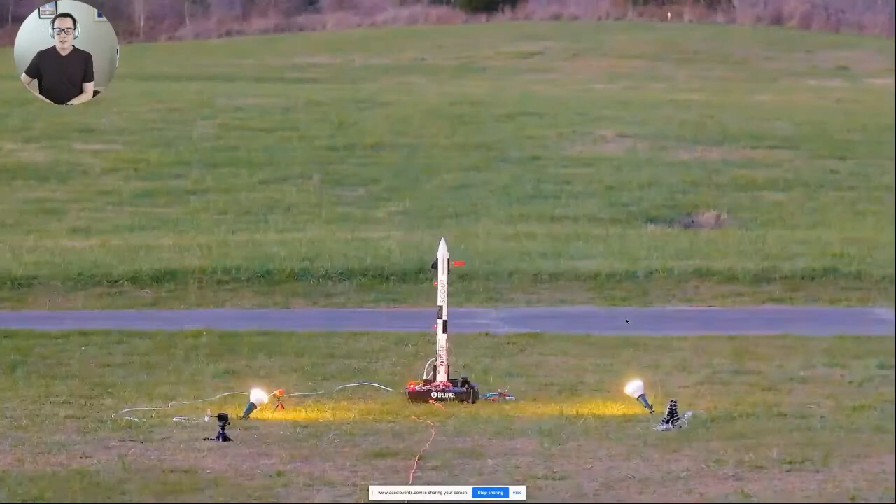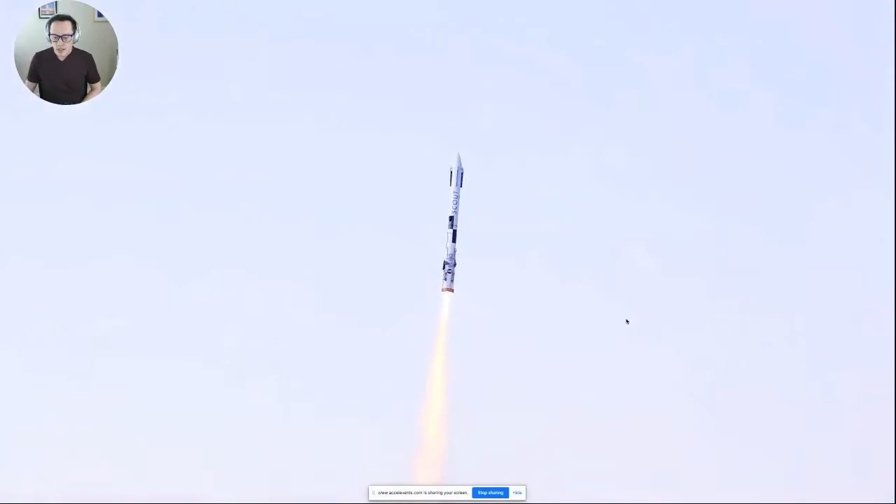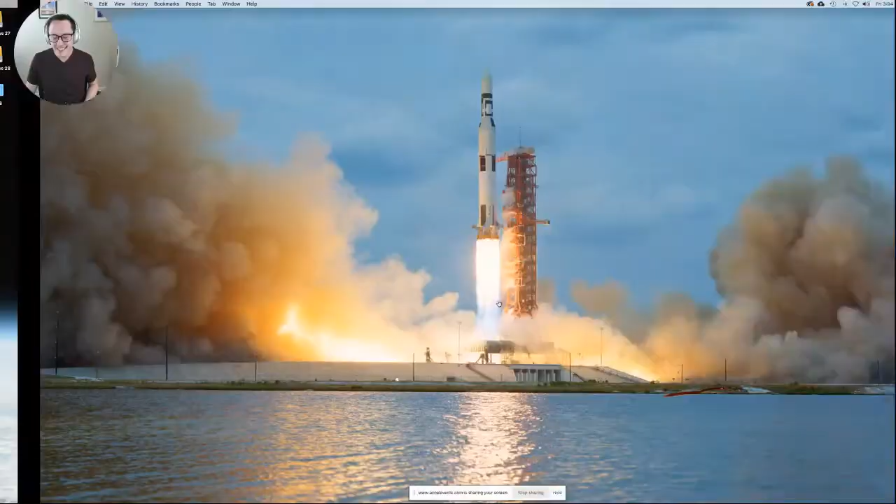First, what I want to do is show some footage so you guys can see what this is. You may have seen this on YouTube, but if you haven't, this is played back at quarter speed. Let me hide this little thing - no, that didn't work at all. Oh no, oh no, what have I done? Okay, let's try this one more time. Sorry about that, everyone, hopefully that's the only hiccup.

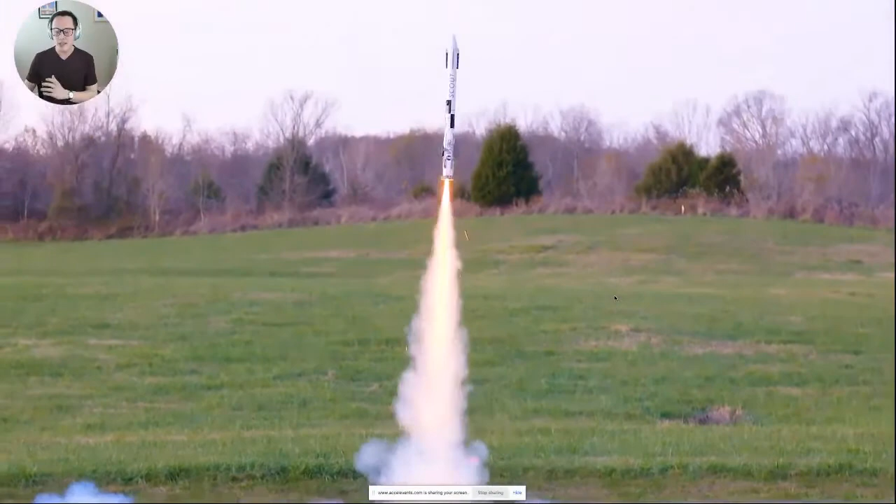So this is Scout E. I've built a bunch of rockets over the last 5 years that I've been running this BPS program, and Scout E is the latest iteration of this design I've been working on called Scout. So we have Scout A, B, C, D, and now E. This was flown in November of 2020, just a few months ago. We go up to about a 30-meter apogee, and the rocket weighs about 1 kilogram.

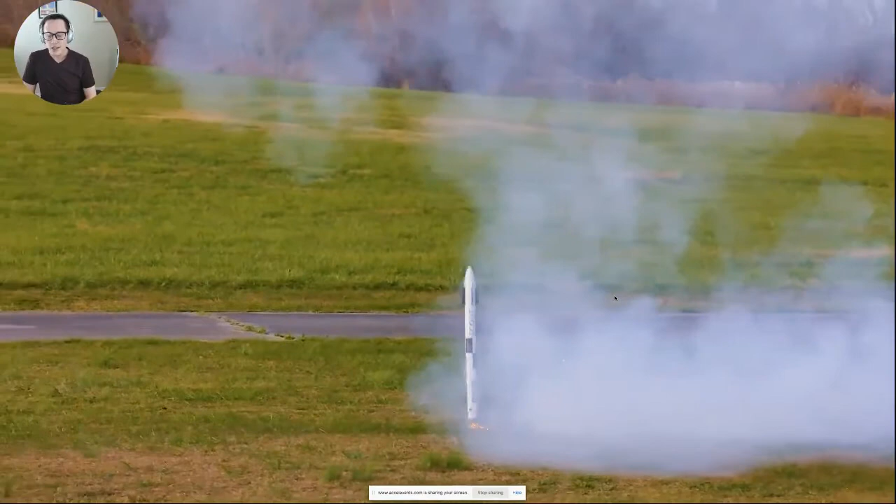After apogee, it pops fins out and ejects one of the motor cartridges - this little Estes F-15 motor - then it comes back down and does its best to try and land propulsively. And of course, as we've seen with vehicles big and small, it doesn't always go perfectly. So this one has a lot of slide on touchdown. We get pretty good with the altitude, a little bit of a hop at the end there, and then - you can't throttle these motors, so you have to get it pretty close. Now, you kind of can throttle these motors, and we'll talk about that in a bit.

But this is Scout. We'll have a lot of footage to review here, and I figure one way we could talk about this is to address different sections of the flight at different times. So first, we'll start by talking about the physics of how this works to sort of prove that it can. Oh, it looks like the frame rate's a little low on this - hopefully that's okay.

Well, we'll keep pushing forward here.

So we'll start by talking about the physics, and we'll go into the things that we need to control about the flight. We'll move on to the mechanics, like how we do that control, the electronics, the things that send the signals to that control system, and then finally the code, how the flight software is set up. So we'll try to address all of these things, and then we'll do questions after.

So starting with the physics, I consider this to be a sort of momentum management problem. And we'll do a quick example in a second, but on the left, you see a photo of two Estes F-15 rocket motors. I do want to address that there is an igniter in one of them. This is taken on the day of launch, and you have to preload that igniter before you fly this thing.

So to be perfectly clear, the leads on the end of that igniter are twisted. It is unable to fire, and that isn't armed until about 10 minutes before launch.

So we've got these two Estes F-15 motors, and one of the remarkable things that Estes has done, whether they meant to or not, is create an incredibly consistent burn profile. On the right, we've got a plot with newtons on the vertical axis and time on the horizontal. So it is a 3.5-ish second burn with an average of about 15 newtons.

This is data captured from actual flights, and this is data captured from, what do you call it, like a test stand with a load cell. So this is flown in multiple environments, these are multiple batches of motors. Their process control on building these things is very good.

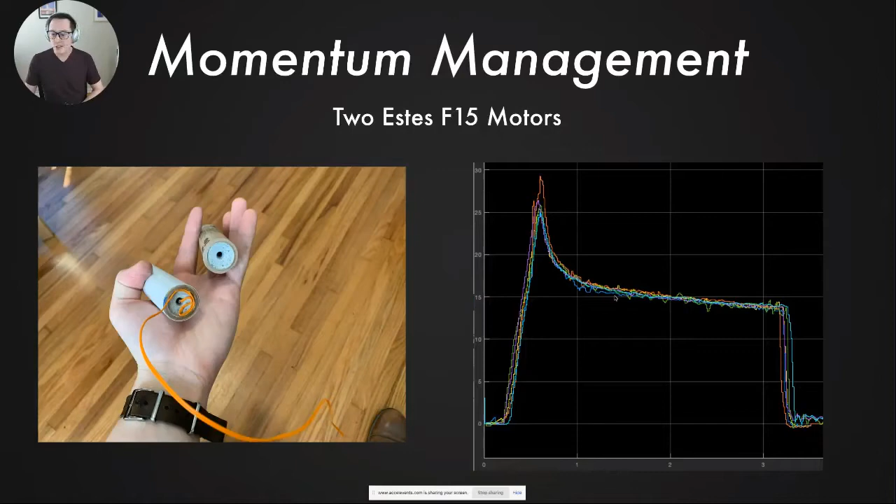I know they have a tour that they're doing on Sunday for NARCON, and I'm really excited to see what they show there. But let's talk more about this momentum management thing.

So consider the scenario where you're in space, in the vacuum of space, there's nothing around you, and we're not going to think about mass, we're not going to think about drag. So you fire one Estes F-15 motor in one direction, right over here on the left, and then you wait 2-3 seconds and you fire a second motor. Assuming the thrust is totally consistent between the two motors, assuming mass doesn't change, and assuming you have no drag, is it possible that second motor could completely arrest the movement created by the first motor?

Put it in the chat, I know the answer, and it's probably pretty clear to most of you. But the answer is that, in theory, yes. If you don't have mass loss and you have the exact same thrust and you don't have drag in the vacuum of space, you will arrest that movement of the first motor every time. You'll bring it back to zero no matter how long you've coasted or whatever.

You put some amount of power into the system, and then you take the exact same amount of power out of it by firing the equal and opposite direction.

So now let's add something. Let's talk about mass. What happens if the first motor fires and we lose a little bit of that propellant mass? So now the rocket that's traveling through this hypothetical space situation has a little less mass. On the right side, when you fire that second motor, are you going to arrest the movement completely, or are you going to end up going a little bit back toward it?

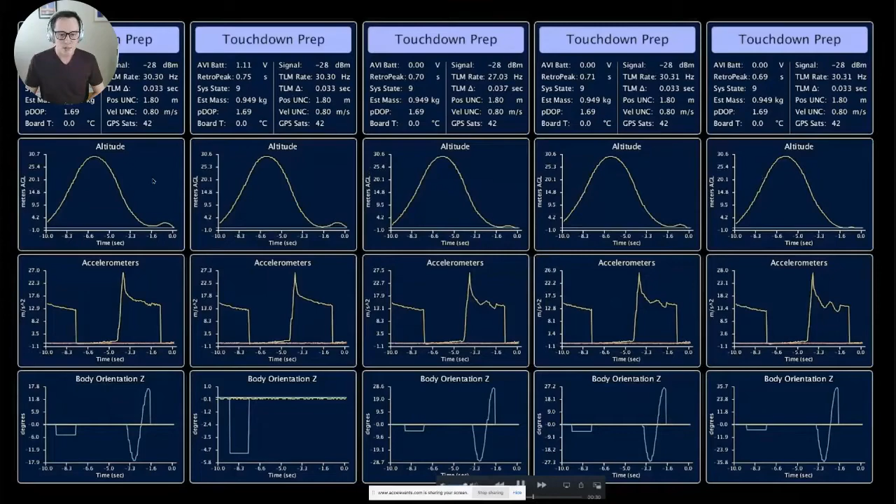This is a complicated slide, but let's focus on these five different simulations of a flight. These aren't actual pieces of flight data, but if you look at the altitude plots, the second from the top, and zoom in, all five have that little hop in them. This is just a physics simulation, accounting for mass loss, drag, and as much as we possibly can without actually flying the thing.

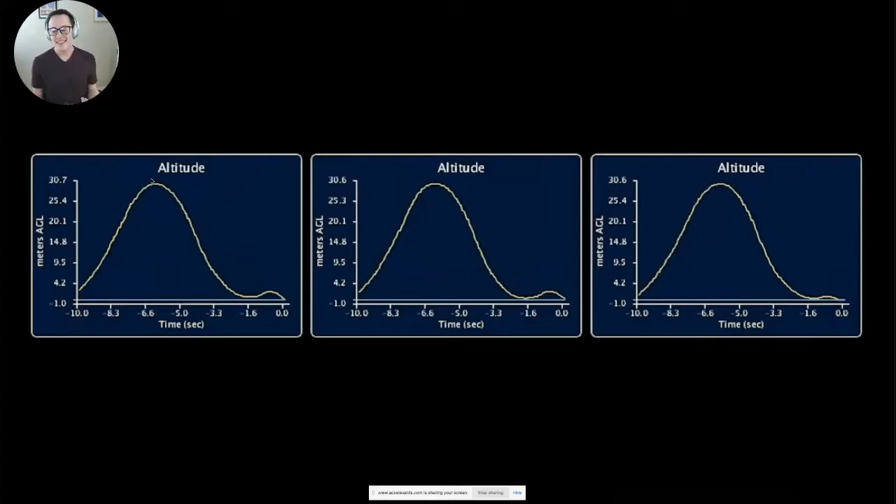So that's just to get everyone familiar with the idea that we're going to have a little bit of a hop if we don't bleed off the thrust some other way. Okay, that's the physics part.

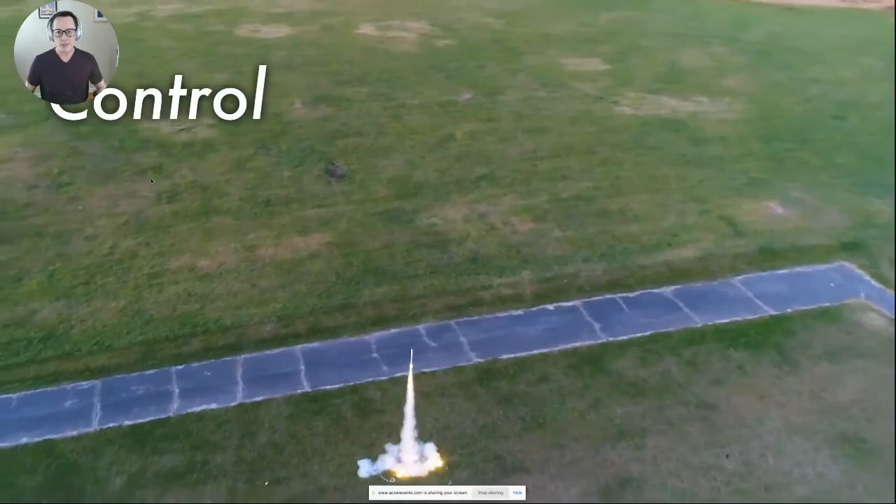Let's talk about control now, specifically the aspects of this flight that we need to control. The first thing that comes to mind, especially for people doing thrust vector control rockets, is your attitude - the angle the rocket stays at. You're balancing a pendulum by gimbaling the motor at the bottom. You want to control your attitude.

Roll technically counts as attitude too, but I'm going to add controlling roll into this separately. You could launch and land one of these things without any roll control, but it makes the control system very happy to have a little bit of roll control. Let me get this glare out of the camera.

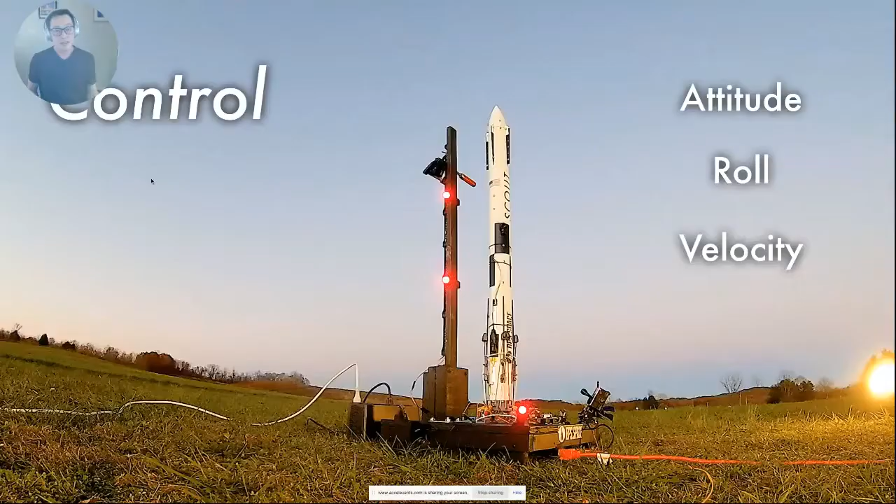The other things we need to control are velocity - not just vertical velocity, but horizontal slide as we touch down onto the ground. We need to control that slide and make sure we're not going to tip, like you see in most of this footage.

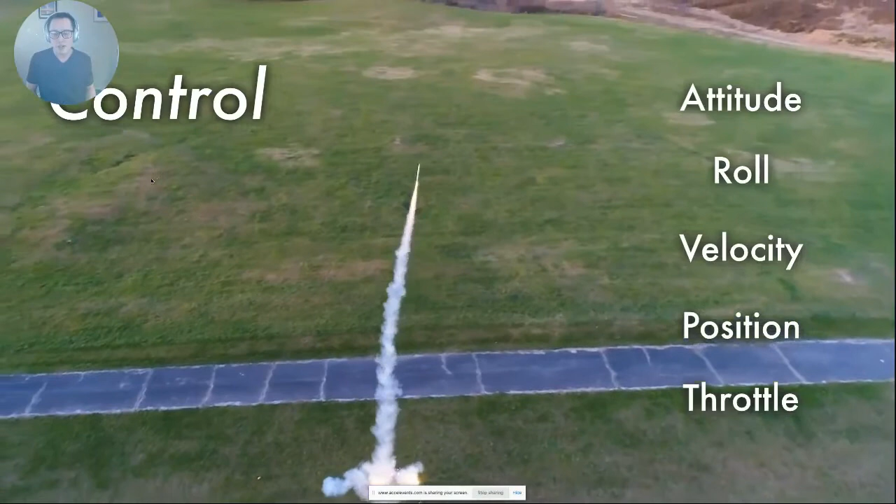By that same effect, we want a little bit of control on position - some of these shots are fun to watch when you can see it coming down off to the right. We want to control position, and then we want to control throttle as well. We need some way to control the thrust, since it's going to be very hard to get it right on luck alone, and enough changes during the flight that you need some type of control over it. So these are the things you need to control.

Okay, let's talk about how you do it. I cannot get the glare out of this camera. Hold on, let me see if this helps. This might make it worse. Well, okay, I don't know if it's going to get much better than that.

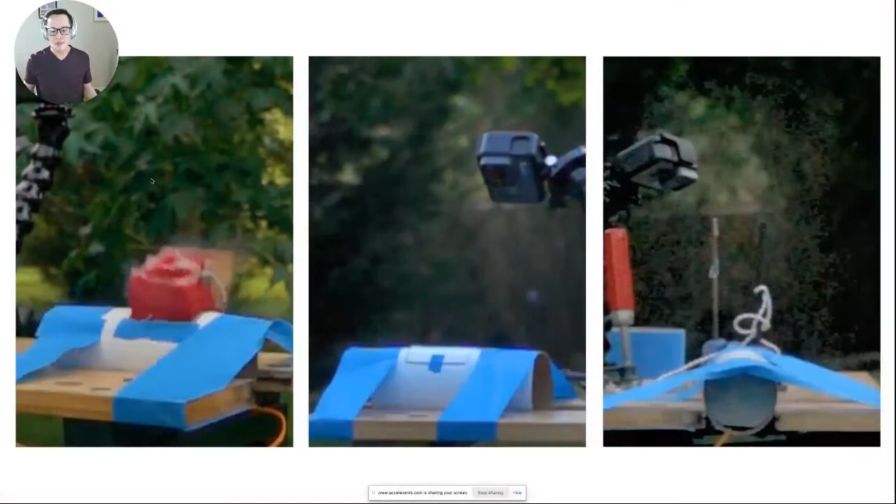So the mechanics - how do we actually make this stuff happen? Let's start with the simplest stuff, let's start with parachutes. You'll notice in the video I showed, there are no parachutes on this rocket, or at least none that deploy. In contrast with most model rockets, we're coming down under thrust.

But what happens if you're going up and a servo fails? Or you program something in wrong and the flight goes off course? Or you try to light the landing motor and it doesn't come up to thrust? These are all bad days. If you're going up to 30 meters in an open field of grass, who cares, you're just going to smash the cardboard tube. But it's experimental stuff, you want to be safe.

So I have parachutes that pop out of the side of this vehicle. Side deployment is usually pretty risky if you're going fast, but because we're going pretty slow, we can sort of afford to do this. You can see me experimenting with a couple different parachute packing methods. This is all shot at 1,000 frames per second. We put a gratuitous amount of black powder in this little compartment to get the parachutes out, and you'll probably not be able to notice it on the vehicle.

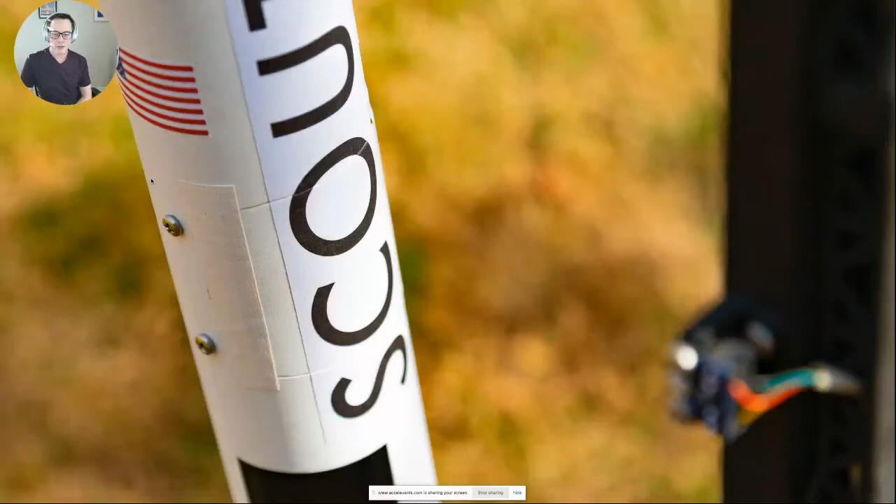It's pretty well concealed, so here's a close-up shot of it. This faces towards the back of the launch pad, and there's a bunch of abort criteria we can talk about later. Imagine the rocket coming down totally sideways, parallel with the horizon - if you fire that landing motor, you're not going to pitch back up in time and spend the right thrust in the right directions. So there are scenarios where you want to use these parachutes, and each flight has those armed and ready to go. Moving on with mechanics, we can talk about landing legs.

The stuff on the bottom of the rocket - these are 2mm and 4mm carbon fiber struts. They're solid rods, terminated by little PLA 3D printed joints, then epoxied together. Dialing these in was really difficult. We had an intern at BPS over the summer who did the majority of the design work on these. The leg ends up overextending, and because the carbon fiber has a little give, we can overextend the leg and have that strut slip into place and be retained there. It took a lot of dialing in, but the huge benefit of using really stiff materials in compression, like carbon fiber, is that there's very little bounce.

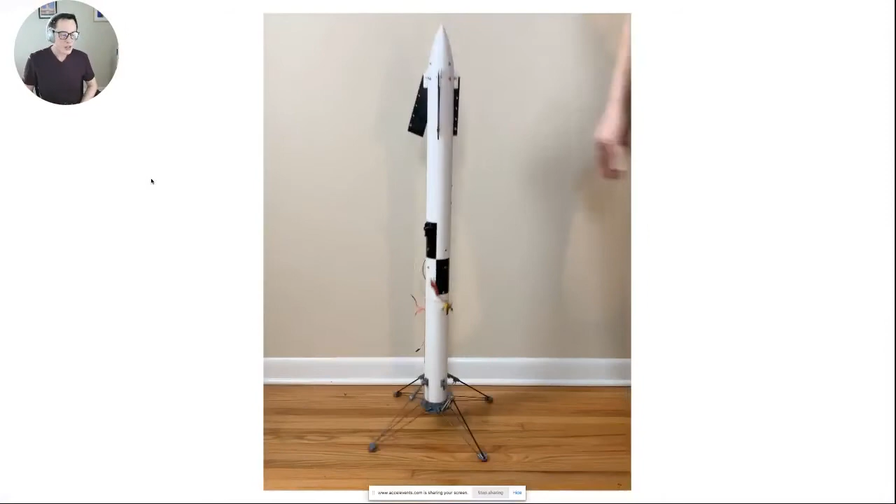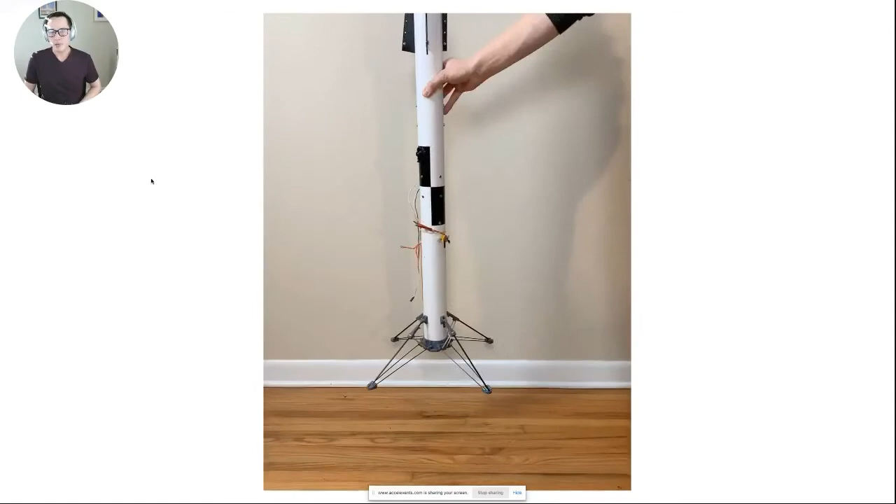I'm not sure how well it's going to translate with the frame rate on this presentation, but you'll have to take my word for it that as this vehicle drops onto the hardwood floor, there's essentially no bounce. As it turns out, all of the bounce in these flights seems to come from the sponginess of the grass at the launch site. We can talk about this later, but we still have to work out some of the bouncy problems with some type of crunch zone or something that can absorb the energy without putting it back into the system.

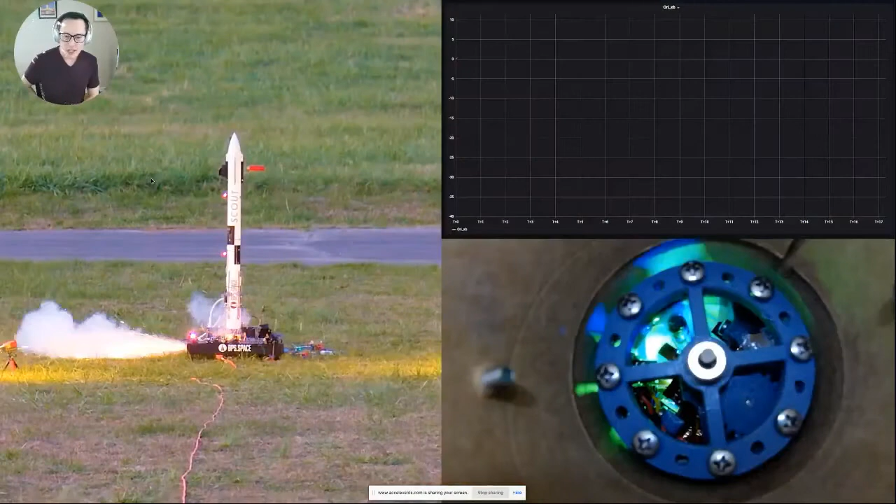This one's going to have to play a couple of times, and it's going to be tough with the frame rate. But this is a roll wheel that's inside the vehicle. On the bottom right, you're looking at the top of the flight computer. There's a little tiny wheel that spins up and down depending on the roll angle or roll attitude of the rocket. The same way a lot of spacecraft change their orientation over time, we spin up or down that wheel to exchange momentum with the rocket. If the rocket rolls one way, we can spin up the wheel and correct for that. Not totally necessary, but it keeps the control system happy if we're not spinning too fast. On the top right, you can see the plot of the roll wheel as it tries to control the orientation. We don't even need to spin it up on ascent, which is interesting - we just don't get any roll torques during ascent. Okay cool, so that's roll.

This stuff is really cool - these are the fins up top and how they work. I'll let this play a couple of times. The fins are printed out of polylactic acid. This is probably objectively the worst way you could possibly make fins - they're plastic PLA, so they're extremely flimsy. You can even see it in the video here. They're very flimsy, so they're not going to put much force into your rocket without bending or giving a lot. But the idea is I just needed something that could barely work and correct the flight while we're in an uncontrolled state.

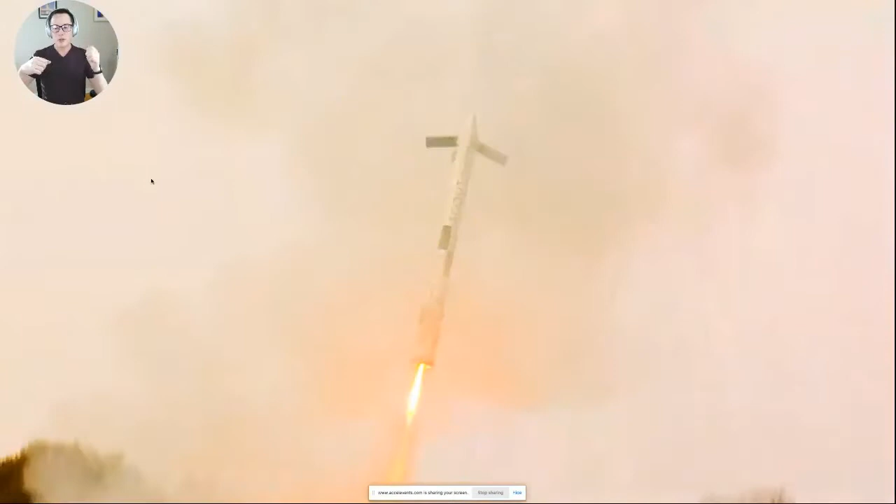The fins are pushed out with a tiny servo up in the nose cone. They're retained in the rocket with a little piece of Velcro that slides against the airframe cutouts. Then they're retracted by gravity, by their own weight, because they're just hinged at that one point. If we go here, you can see them deploy in flight - watch this a couple of times. The motor ejects, the fins come out at apogee, then here we go coming down. If you look closely, you can see the fins bend. When we come up to peak thrust, the fins slightly sag because the servo is actively trying to resist them going back into the airframe, especially under peak thrust when we're at probably 2G of acceleration - it starts to push a little harder on the servo.

But anyway, the fins come out, and you can see they definitely work. Without those fins, we would have rotated a lot further in the other direction. Trying to prepare for the landing burn, we want to be as close to upright as possible, which makes the rest of the flight a lot more predictable. Then we bring the fins back into the vehicle. I'll show some data about this later.

The fin criteria for being deployed: anything past apogee, the fins must be open, and anything under 4 meters per second when we're close to the ground. After about 4 meters per second, the fins have very little effect, and frankly we could put them back in the vehicle at this point too and it would be fine. But that's just sort of how the controls on those work.

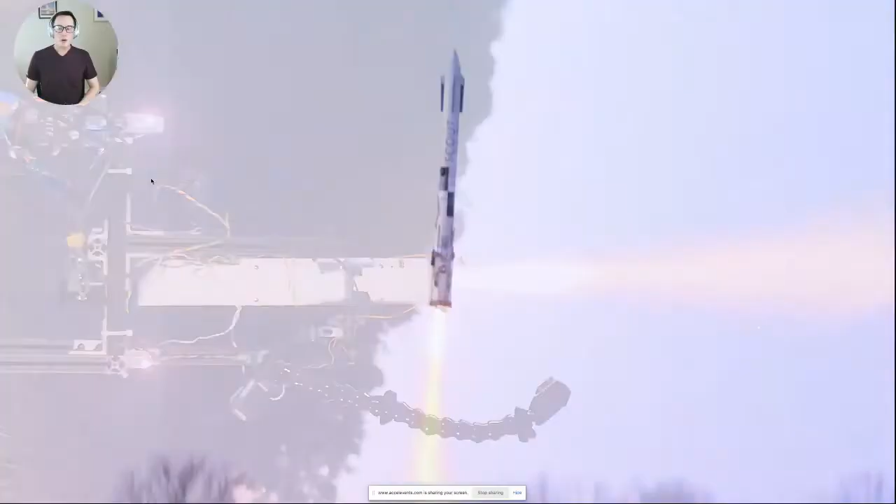Oh, I forgot I put this shot in here. This is a nice little digitally stabilized shot, so it's very rock solid in the picture. But you can see the rocket sort of kick itself over on ascent to clear the pad for when it's coming back down.

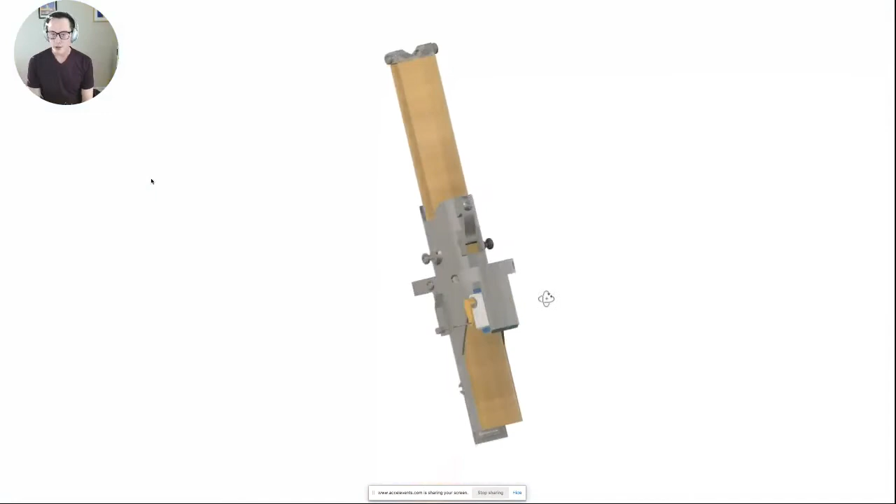In the meantime, I'll keep talking about the motor. This is the CAD file, the design file for the thrust vector control mount. It looks a little wild and odd, but I'll walk through what's going on here. There are two motors in the frame. The top one is for landing, stored in the airframe. The bottom one is for ascent, so that's what gets us up to apogee.

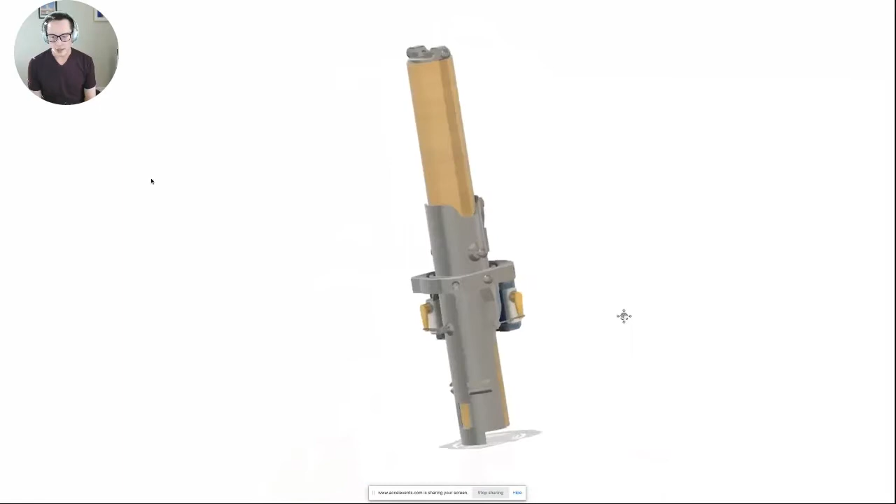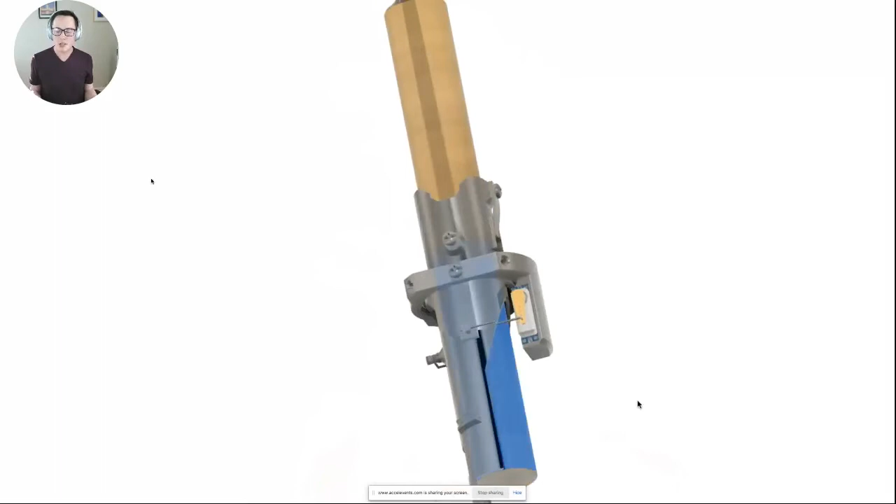On the top motor, there's a little bit of a hat, literally called that in the CAD - it's just a motor hat, like a little party hat. The two screws you see on the side have a set of springs constantly putting tension against that landing motor. So all it takes to get the landing motor into place is to remove the ascent motor. It's a design I'm quite proud of.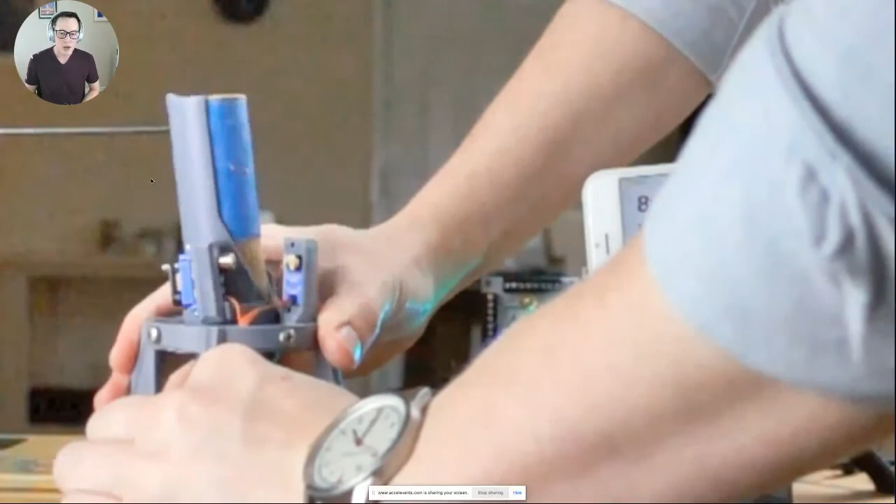Anyway, let's take a look at some footage. We have to remove the ascent motor to get the landing motor in place, and you can easily see how it happens. When we slam the ascent motor into a rod and slightly bump it out of place - because we only have that half circle encompassing most of the ascent motor - when we slam it out of place, the landing motor slots into place, and you can see that locking pin engages so that the landing motor can never go back up into the airframe.

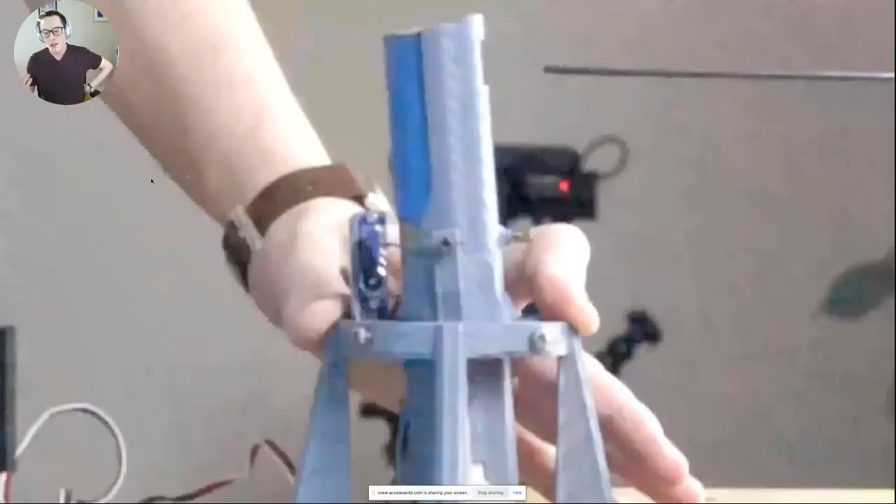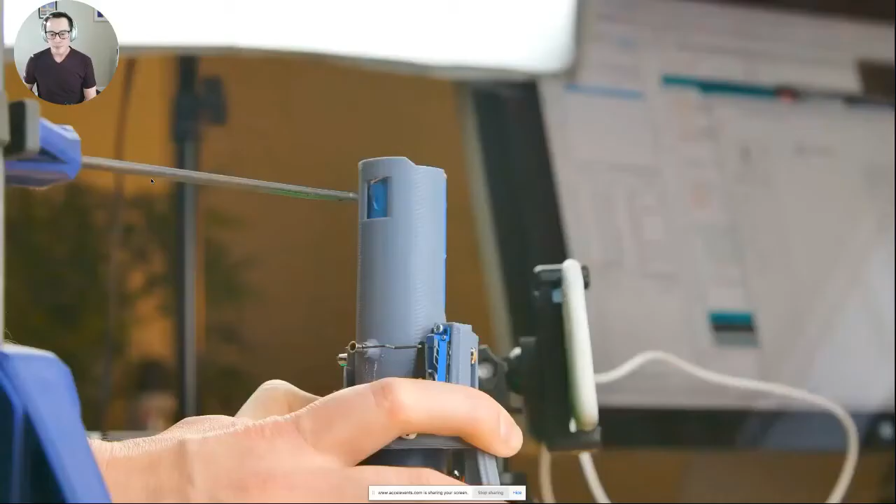It took a ton of dialing in to get this right, and you'll see footage on footage on footage of how this works, because it's totally new. I've never seen anyone else do this, and you can imagine how bad the day would be if the flight failed because something as simple as this didn't work. You certainly don't want to fire the landing motor when the ascent motor is in there. So there's just a bunch of footage of this - some tests are more successful than others. Again, copious amounts of characterization here.

So what I'm doing in this shot is trying to see, over multiple motors with slightly different masses, how consistent the ejection forces are by ejecting it upside down. I'm also testing how you can safely mount the igniter in the landing motor and not have it come out during this violent event.

This looks very slow and graceful. The problem with this is, of course, it's violent. It's violent as heck, and so I am a little concerned about propellant fracture if you do this with a motor too much. I wouldn't eject this thing 10 times before you fire it. There's some, it's a little concerning to try and get this ignition cable out of the way.

It works fine for the flights, and so much of this stuff is just insanely complicated that whatever, let's add more complexity. But anyway, so here's some more shots.

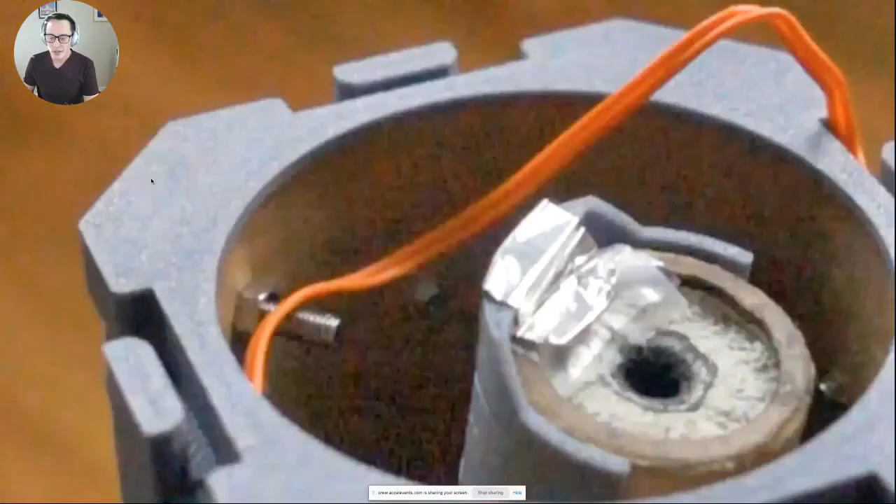One of the hardest things about getting this right was the static friction between the ascent motor and the lip that retains the ascent motor, the lip that the landing motor slams against. So here you'll see a failed test where we hit the ejection pin and nothing happens because there's all of that spring-loaded force pushing against that lip.

So I'm experimenting with tons of different materials in between. A 3D printed surface is not that smooth. Any of you who have tried 3D printing before know that the surface, depending on what it is, has all of these little boundary layers, these little ribs on the print. And so if I want to keep manufacturing this part out of polylactic acid, which is really convenient, so I do want to,

I had to find some way to make this ejection more consistent. I mean, this looks janky as all get out here. This is sketchy. So what I ended up realizing is, how do you move a heavy object across a flat surface? You roll it.

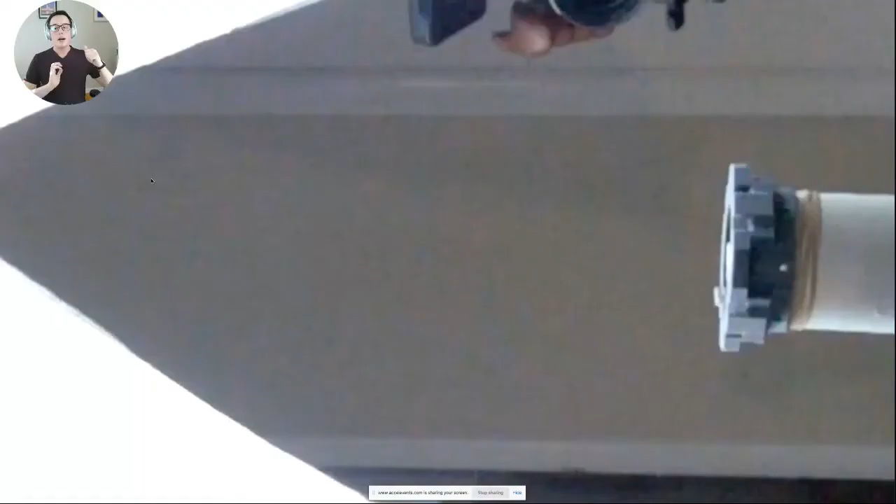So there's a steel roller bearing that's a part of the design now, and you can see it in this shot a little bit better. We get rid of all of that static friction problem because it's very easy to eject the ascent motor if all of the force is against what is essentially a large, as large of a surface area as you can get wheel that it rolls along to eject the ascent motor.

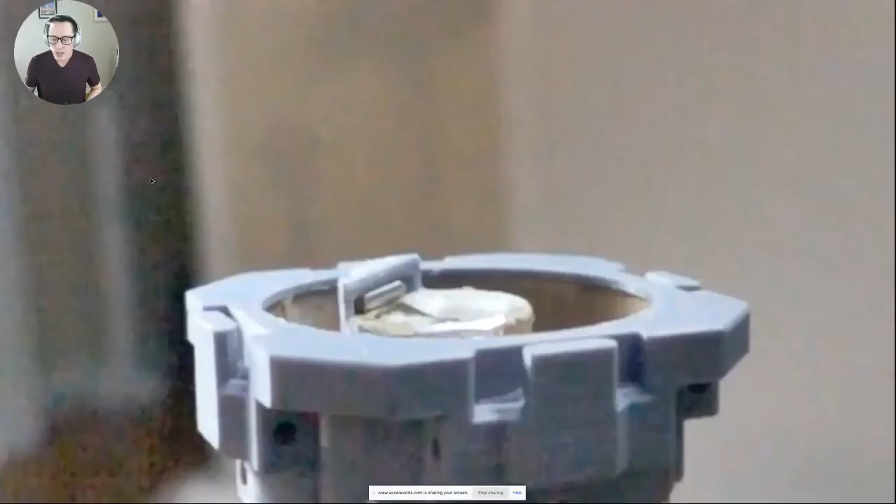And this ended up yielding really high reliability, and you can see there's a bunch of tests with it here. I can't remember how long this clip is, actually. Let's see if anything else comes up. Yeah, I think this might be the last shot in here. But yeah, so you roll it along that little lip, and then it slots into place.

Okay, now we can talk about electronics. So with electronics, what do you need to control? Let's think about that from the top level.

We need some ability to fire parachutes. Again, you don't want to, but you want to have the safety of doing it the right way. And so part of that is having some backup system in there in case the second motor doesn't work.

We need to be able to actuate the upper fins, which could, in theory, be pyrotechnic deployment if you wanted to do a one-time deployment, so you need a couple of pyro channels. Same with leg deployment. The way I deploy my legs is they are constantly spring-loaded, and we cut a little nichrome wire, or cut a little rubber band with a nichrome wire, and that deploys the leg. So that has to be another pyro channel.

We need the ability to control a roll wheel and TVC servos, so those are PWM outputs. That's like a servo-type output.

And then in terms of sensors and components, the things we need are, first and foremost, an inertial measurement unit. This is going to give us measurements of our gyroscopic rate, how fast we're moving, the angular velocity, and acceleration, linear acceleration along 3 axes.

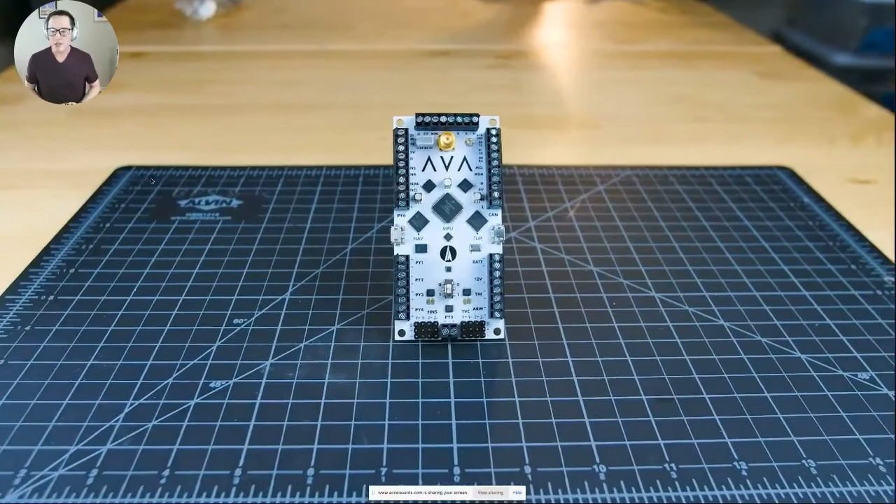I ended up designing this computer about this time last year. It's called AVA, which stands for All Vehicle Avionics, and it has all of those sensors and more. The design philosophy behind this, it has 3 processors - that's what we're showing there.

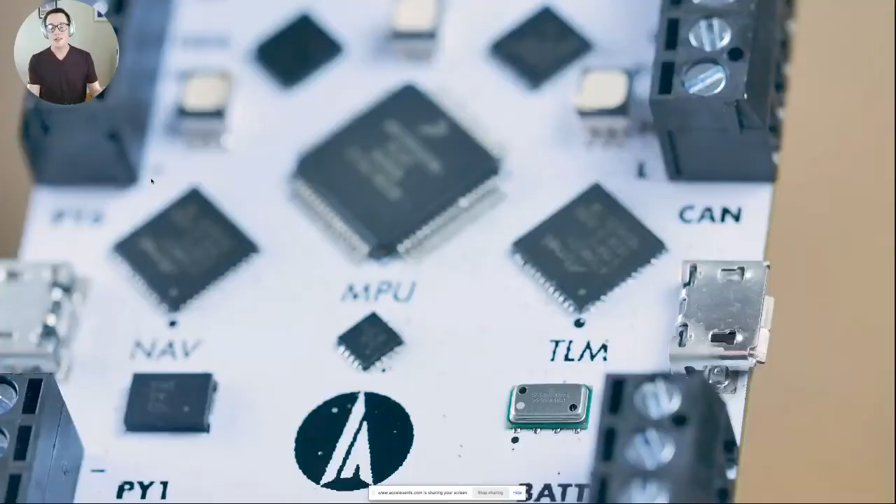I've designed a bunch of printed circuit boards, way too many, and I was kind of getting sick of it. So I decided what I'll design is one circuit board to rule them all, everything that I need for the next 2 years. And so that's what this is.

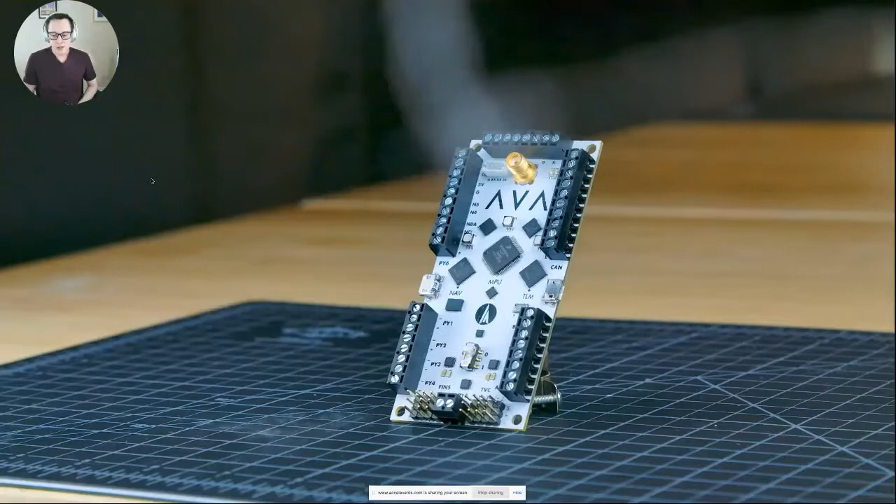It's got an inertial measurement unit - it actually has 3 technically. It has a barometer, GPS, Bluetooth, all sorts of stuff. It's a very, very fancy computer.

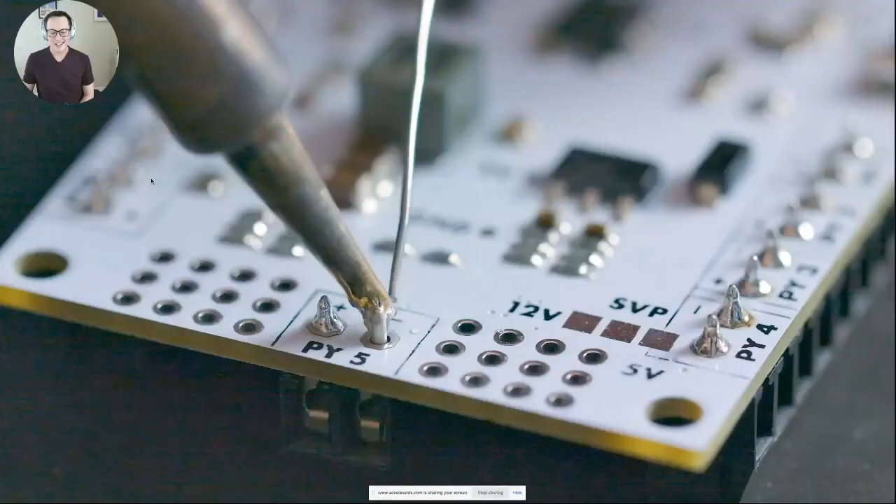And when they catch on fire or crash into the ground, it is sad because they're also expensive. Okay, definitely not speaking from experience on the fire or crashing into the ground. No, sir.

Okay, so now we can talk about software. This is everyone's favorite thing because it's really hard, and coding is kind of also hard. At the core of most of the stuff that I build is something called a state machine.

A state machine is this really powerful way that you can set up software so that you can run isolated chunks one at a time. They're found in almost any device that you have - if you have a smart fridge, it's probably running a state machine in some way.

An easy way to look at it would be, for this specific flight profile, we have different states of the vehicle where we run different little chunks of code over and over again, and that lets us isolate things out.

So what states would we have for a rocket like this? We could start with the idle state, the state where it's on the pad, just reading sensors. We could be calibrating some sensors on the pad constantly, and then we want to detect launch - that would be one of the things we run in this control loop of the state.

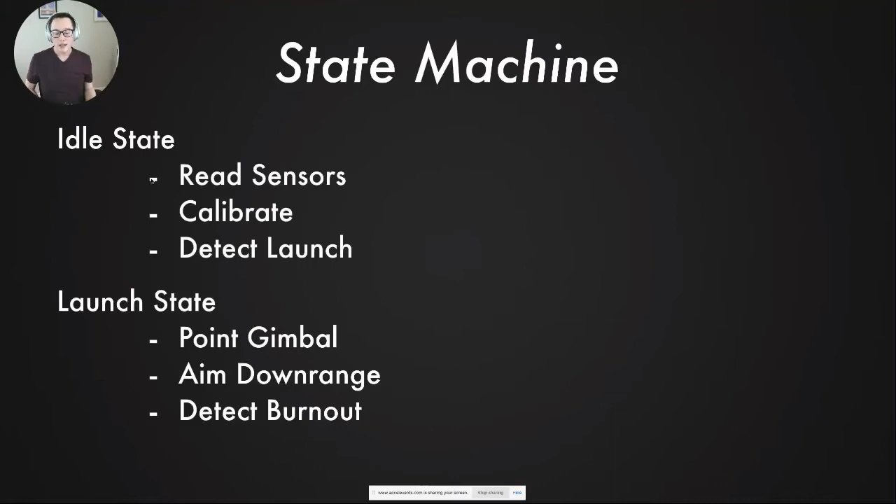Then we have a launch state, when we're flying under thrust. We're pointing the gimbal mount, pointing the rocket motor, aiming down range to try and clear the pad a little bit so that when we come down, we don't hit it. And we're trying to detect burnout - that's the launch state.

Then we have a coast state, where we eject the motor, deploy the fins, and start the second burn. Right, so that's our coast state.

And then finally, we could have a landing state, which is triggered by the starting of that second burn. We restart the gimbal, we plot the throttle divert maneuver - I can't remember if I talked about that yet, there's a lot to talk about - and then we detect the touchdown. So these are all of our discrete states of our state machine, and this is a vastly simplified version of what's going on.

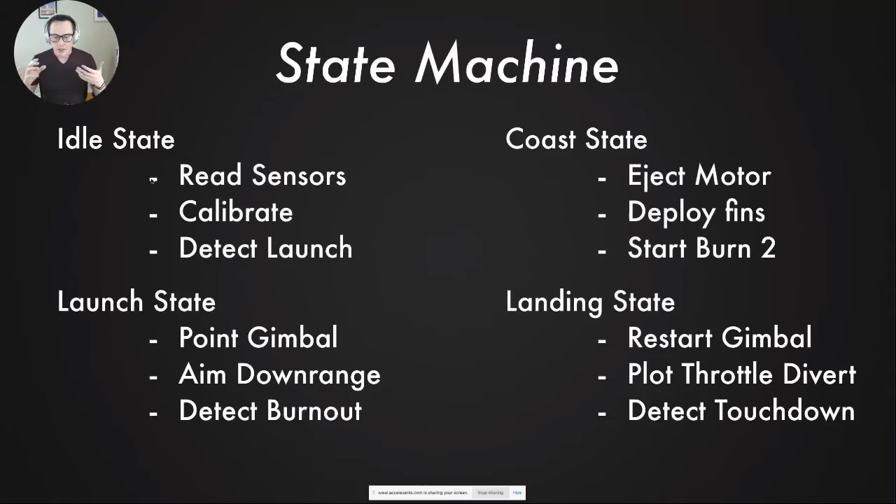So I'm going to play the live telemetry. One of the things that Ava does is beam telemetry back down to the ground. I wrote a telemetry visualization software that shows the state of the rocket and what the flight computer is doing. Take a look in the upper left of the screen, and you'll see the state is ready for launch, and then it flips to flight vertical.

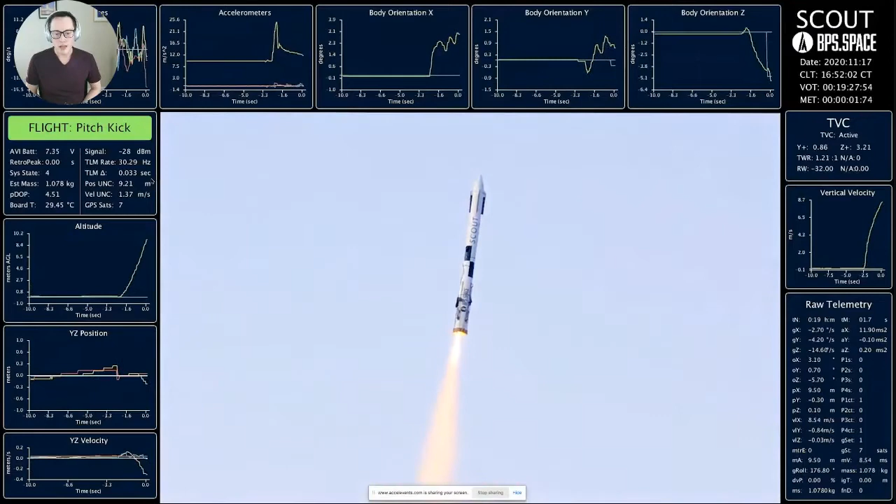You'll see it flip again to flight pitch kick, which is where we're trying to head a little bit more actively down range. Then, 1 second after burnout, we go to unpowered ascent. Watch when we pass apogee, we go to unpowered descent. Fins come out, and then right here we should switch to landing burn startup.

Right after we start that burn, we take a few measurements and calculate a divert to bleed off the excess thrust that we don't need. So it's a 3.64% divert. Then we do a little touchdown prep, which is basically a settling maneuver. We're trying to kill those gyroscopic rates and keep it as upright as possible to have the best chance of landing. So those are all of the states that the rocket goes through.

Of course, we have states that aren't shown here, like an abort state. If I ever send the abort command from the ground, we can beam that to the rocket, or the rocket can decide to do it itself. It'll pop the parachutes out and move to an abort state. You never really want to see it, but it is pretty cool—it turns the whole thing red. So we'll watch this one more time.

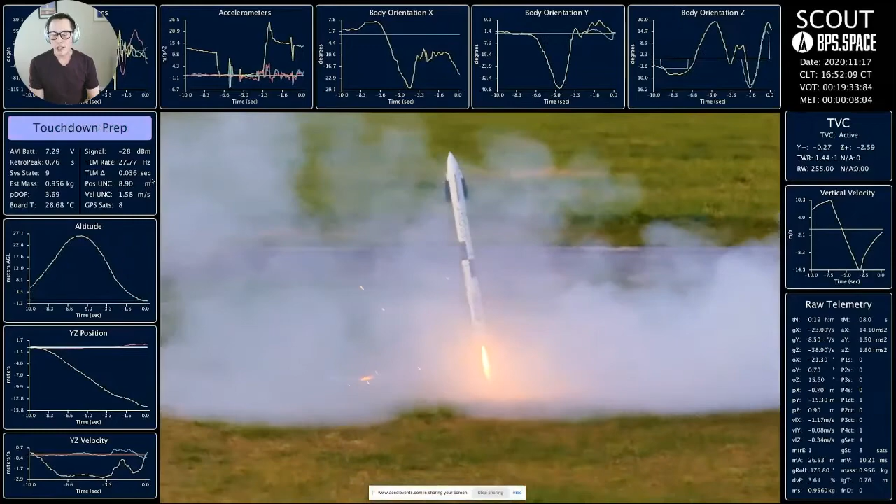You can also take a look at some of the other pieces of data showing up here. You have vertical velocity on the right, altitude. If you look at position and velocity in the bottom left, you can see us move—we end up going about 10 meters downrange. You can also see the thrust curves and the accelerometers. This is played back; the whole flight is like 9 seconds long, so it's played back very slowly.

Okay, great, so that's that. Okay, Kalman filter—raise your hand if you've heard of a Kalman filter before. I can't see anyone's hands, so we'll assume maybe 1 or 2 people have, and we'll try to cover it in a really simple way. This is one of the more important things that I ended up working on with the software for the landing stuff.

You need to be able to measure exactly where you are to make decisions about how much you need to divert the rocket to bleed off excess thrust. You need to be able to measure exactly what your orientation is, exactly how fast you're moving. You need to know a lot about your situation. And the problem is that many sensors return data that's really noisy or very slow.

Right here, what you're looking at is a data plot, time on the horizontal axis, and speed in meters per second, that's velocity. This is the GNSS_X_Vel_m_s—not a very catchy name, but essentially these are the GPS readings. The GPS is saying, I think this is our velocity going up and down. At 3 seconds, we're up to almost 10 meters a second, and at 6 seconds, we're down to almost negative 15 meters per second. So you can sort of see the flight profile here.

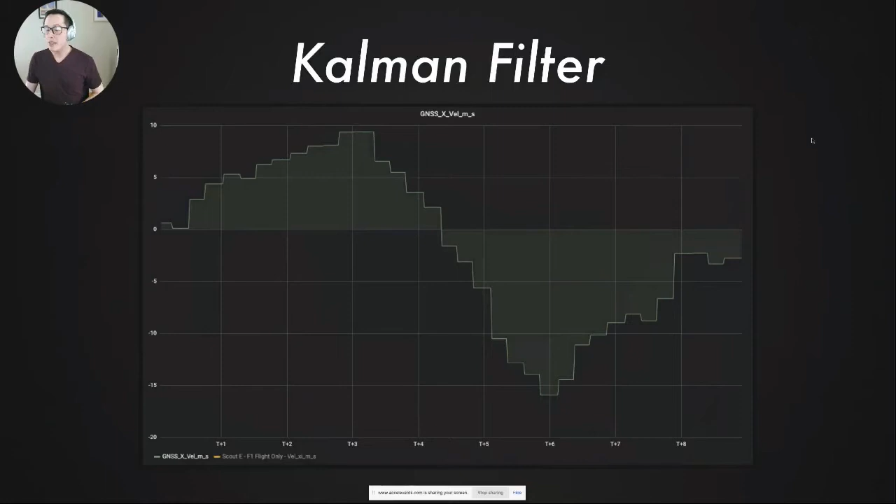So what's a really high-speed sensor that we could use for this? What about an accelerometer, which does not measure velocity, right? The accelerometer measures acceleration, but velocity is the integral of acceleration. Acceleration is the derivative of velocity.

Getting into math here. But if we take this acceleration data and integrate it over time, we'll get our velocity on the rocket. And as long as that acceleration data is pretty well accurate, pretty well calibrated - this is actually the real data from the flight here - if it's pretty accurate, we could come up with an estimate of how fast we're moving.

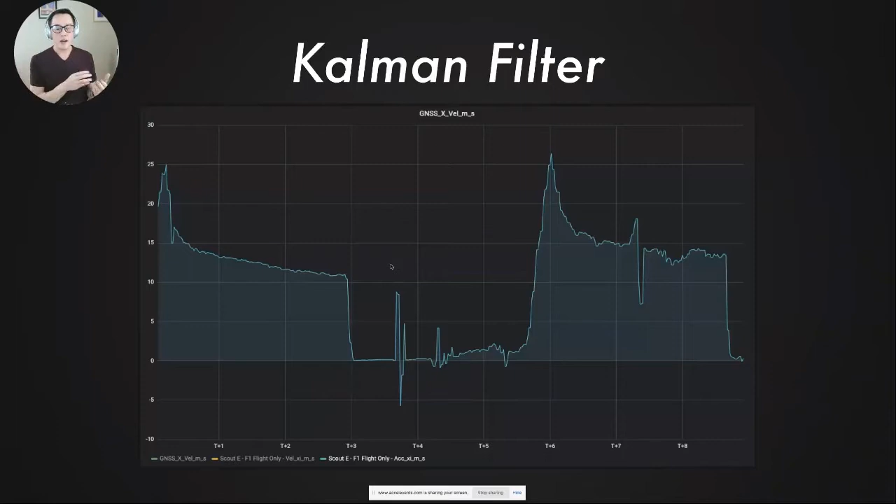And we could probably use the known noise profile of the sensor to have a good idea of how accurate that data is. We could quantify that.

So what ends up happening in a Kalman filter is we use these external sensors that may not be directly correlated or directly responsible for the measurements, but they definitely have some correlation with the measurements we want. So we want to know what the velocity is. If we integrate that accelerometer and keep track of how noisy that sensor is, we can get a pretty good velocity estimate. And that's what we have right here, all the way down to us going up a little bit, having that little hop. We have a little bit of positive velocity at the end of the flight.

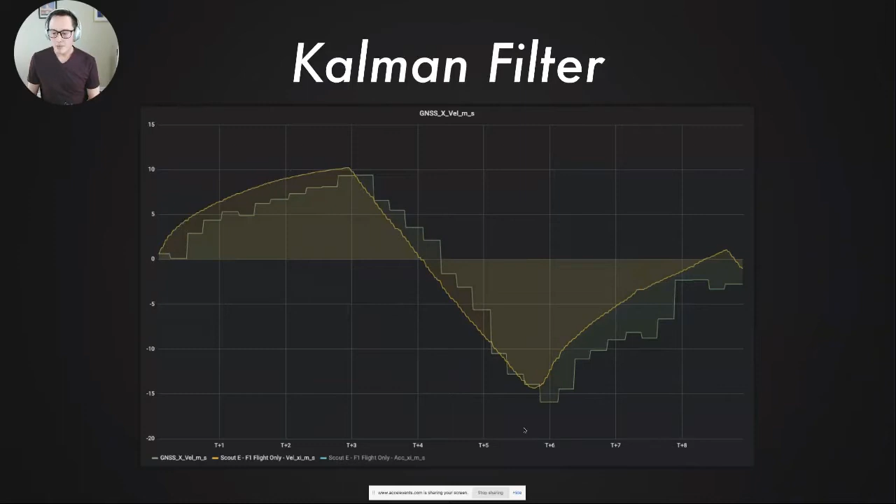And you can see that this data ends up being a lot faster. The GPS reports slowly - we're only coming in at like 4 hertz of update rate here. But if we take those accelerometer readings and bring them in, this is really smooth data that we can work with.

PID controllers - this is a slide from last year's presentation. Whether you saw it in Tucson, Arizona when I presented, or saw it online, or didn't see it at all, I'll do a really quick overview.

A PID controller is not a physical thing. It's sort of a set of math, a set of equations that you can use to try and control something. So the example that I use a lot is trying to control the angle of the rocket. With your rocket at 10 degrees, how do you know what gimbal angle to set so that you can come back from 10 degrees?

And so it ends up being pretty simple. If we have angle on the right side here, we can do some math on that angle and then come up with an equivalent thrust vector control mount angle to correct for it.

So we have a P term, which is directly proportional - whatever we set here as a number, we just multiply it. So it's 0.5 proportional to the angle. If the angle is 10 degrees, the resulting value will be 5.

The integral, that's the I term of PID - the integral takes the error over time. And so this is usually a pretty small value that helps us correct for misalignments, can correct for a whole host of things. And then the D is the derivative.

We take dx over dt, which is the derivative of the angle. You could also feed in the direct gyroscopic rate - that would also be the derivative of the angle. We multiply that by a small value, and we add all those things together, one big PID soup, and then we write that to the TVC mount.

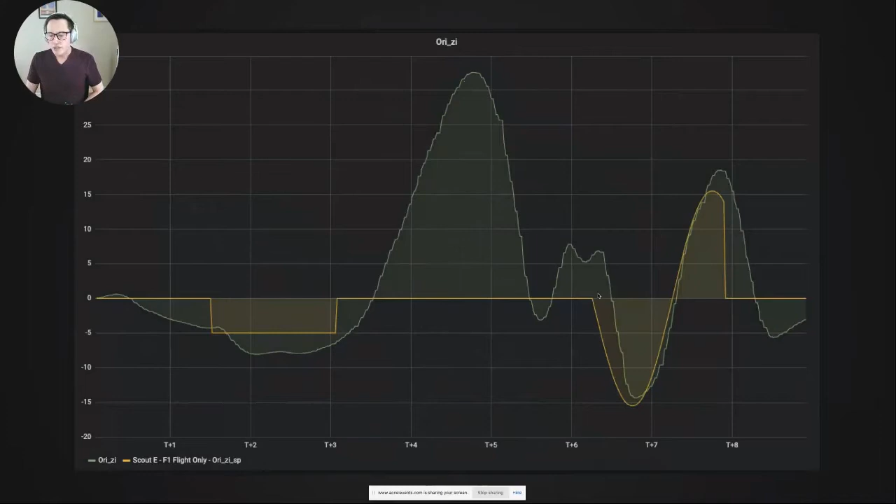Because our control system is really dialed in on landing, that pitch looks kind of wild on the footage, and it looks like, oh my gosh, this isn't well controlled. It actually is. This is very close to what the simulations show. We cut it off a little bit early because there are a couple other phases of the settling maneuver that we want to hit. But basically, this is a PID controller that's trying to track this set point. It's trying to command the rocket to exactly 15 degrees negative and exactly 15 positive. And of course, we don't exactly hit it, but it's quite close.

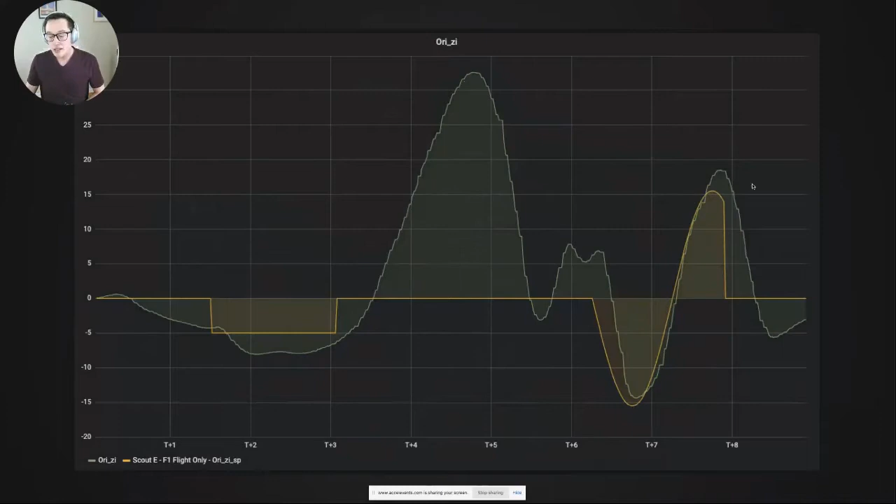We can also see PID control at work on the velocity reading. So this is the horizontal velocity. It gets a little easier to understand if you think about it from that camera angle again. So we are 0 velocity on the launch pad, obviously. But then when we take off, when we lift off, we have that little bit of an angle, and we start sliding down range. So we slowly accumulate this velocity up to about -3 meters per second.

And then when the motor burns out at T plus 3, we're just coasting, right? There's nothing to change our velocity. We don't have a whole lot of control over that. Then when the motor comes back up to thrust, it does an initial maneuver to try and bleed our velocity off. So that's what this big dip is. And then we do our sine wave divert with a settling maneuver at the very end, where we try and cancel all that velocity. Now, here is where a clear discrepancy exists.

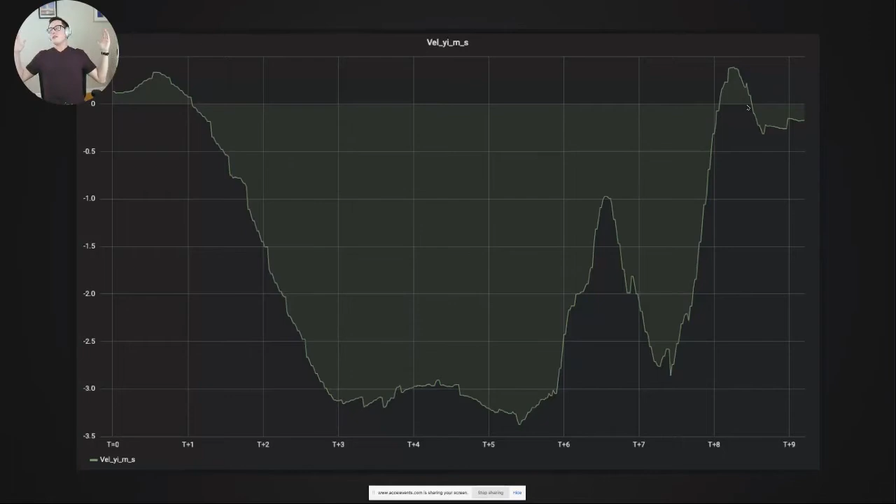So you can see at the very end of the burn, we are at like 0.25 meters per second, not squared. This is really slow. Like if you think about it, over the course of 1 second, if we're sliding 25 centimeters, that's nothing. But that's not the case. You've seen this footage. We're sliding like 2 meters a second in that, which is obviously too much because then we tip over. So if you see how spiky this data is, it's a little too much to get into, at least without someone asking a specific question about it.

But essentially, the GPS antenna was very noisy on the day. High definition cameras are very noisy with radio frequency, and they mess with GPS quite a bit if you put the antennas too close together. And so the GPS tricks our rocket into thinking that it's not sliding very much. So from a control systems perspective, the rocket did a really great job and thought that it was about to touch down successfully because it didn't know that it was sliding as fast as it was because the data coming in was bad.

We can look at a couple more plots here just to address how the rest of the flight went, and then we're almost done and we can take some questions here. So obviously this is the vertical velocity profile here. So we go up to about 10 meters a second, go down to a little bit less than that.

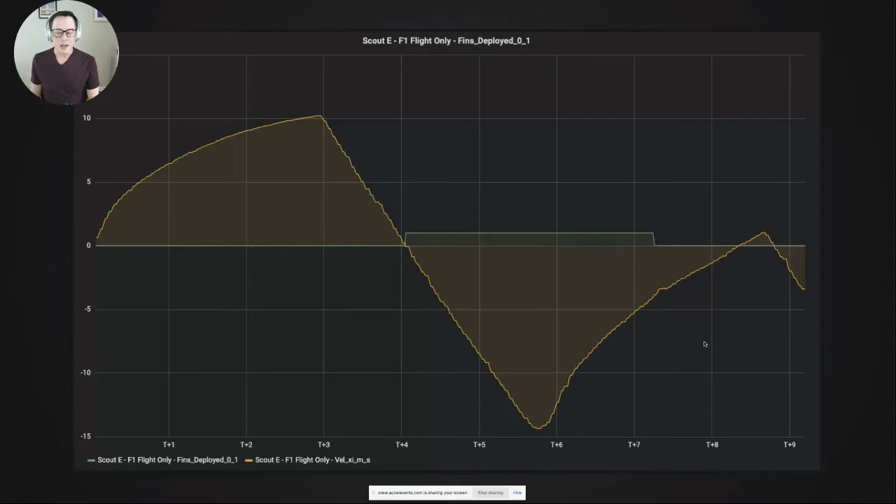And what we're looking at here is a 0 or a 1 on fins deployed. So this is the command that the flight computer sends to the fins to deploy. And then the logic that I have to retract the fins is once we are past apogee and past the peak vertical velocity, as long as we are below -4 meters per second, we put the fins back in. So if we never made it below -4 meters per second, the fins would have still been out.

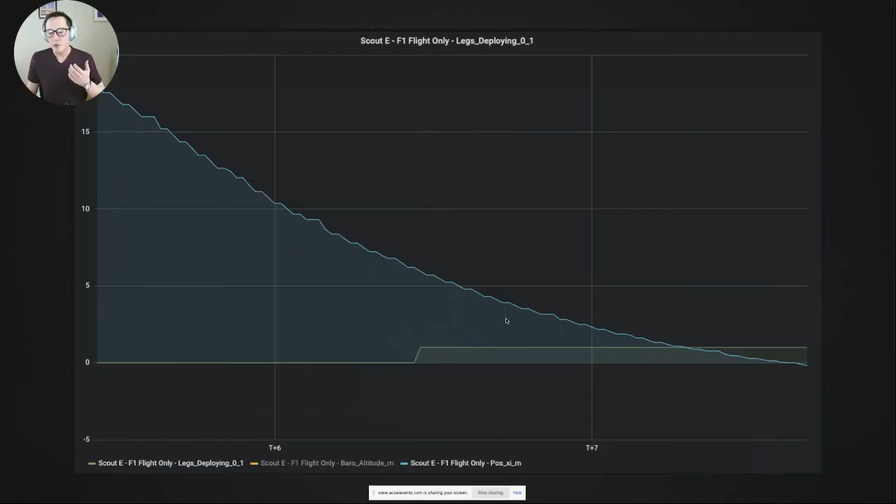Wonderful. This is the leg deployment logic. So this is the vertical altitude. This is the altitude of the rocket on the blue line here, and the green line is if the legs are fired or not, if the legs are deployed or not. So when the green line goes up, we're actively trying to deploy the legs. These are deployed based on if we are below, I think it's 6 meters, we fire them, but you can see that they actually end up deploying much lower because it takes about a quarter second for that nichrome wire to heat the rubber band up and for those legs to deploy.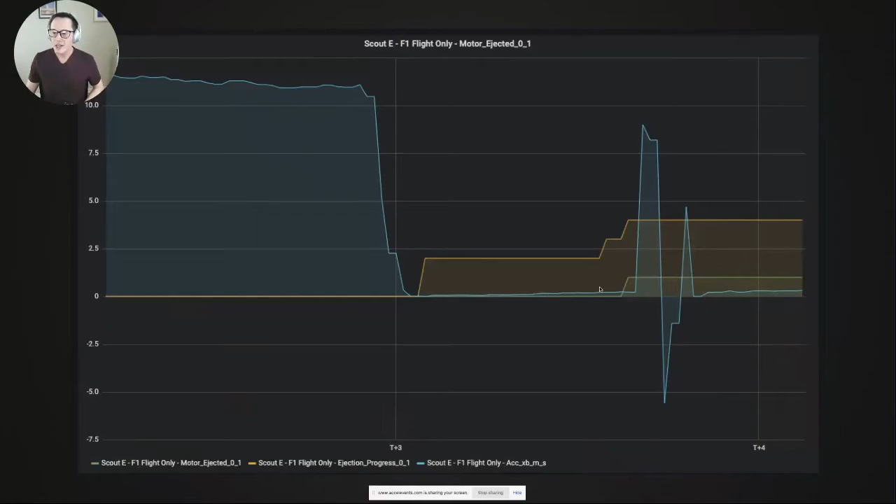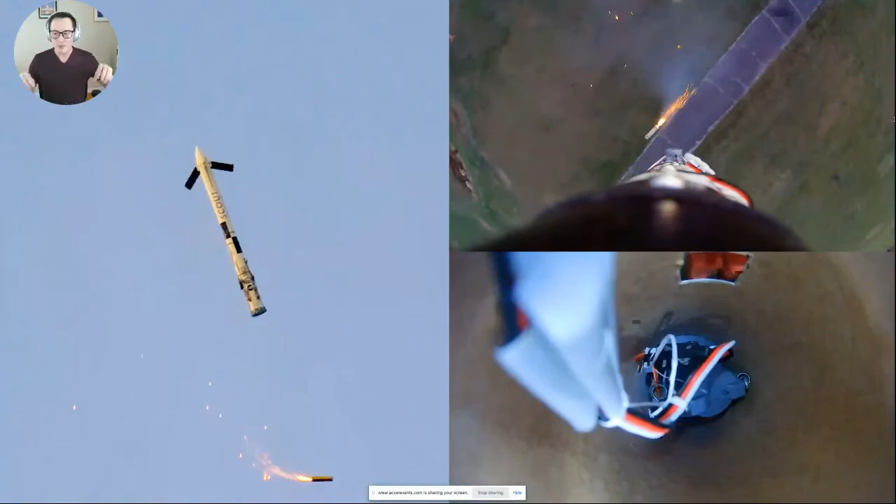So here's the internal view. We have a motor. This is a camera that's actually on Ava, on the flight computer, pointing down at the thrust vector control mount with some little internal LEDs. And so you can see the motor kick against that ejection pin and then slide out. These are all synced up. I'll let it play 1 or 2 times here. You can also see that motor hat.

It was really tough to get these wires to not mess with the motor mount. These TVC wires are difficult to do cable management on. It would have been a lot easier to run these wires on the outside of the rocket instead of the inside.

So that's that. And then, I wanted to talk about this too, because I didn't do a good job explaining it. And then we can take questions.

So if we fire early, we're going to land high. If we fire late, hold on, let's see if I can line this up. If we fire late, we're going to hit the ground, right? So what if we fire the motor a little early always, right?

This is how we end up doing the throttle maneuver. If we fire the motor a little early always, and then we pitch back and forth to cut out that horizontal velocity that we create, but we change the amount of the motor that we're firing vertically into the system, we can effectively throttle it.

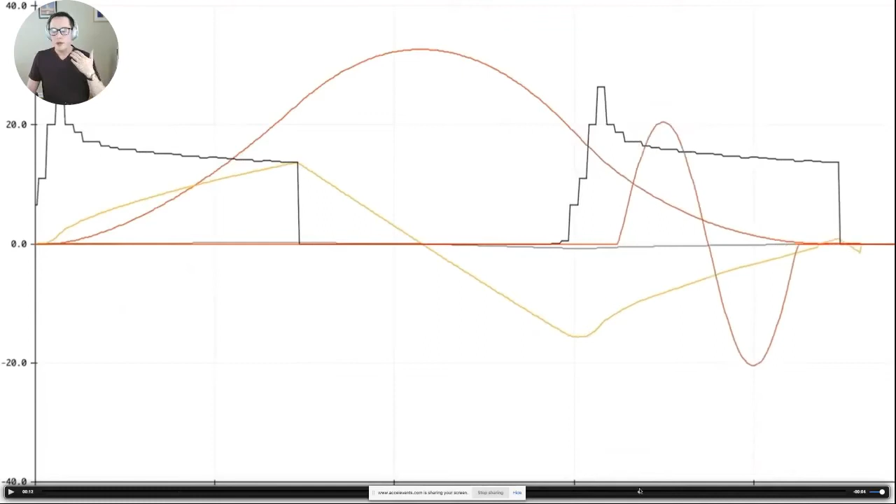Each time it's about a meter. We're changing the descent curve, sort of changing the radius of that descent curve. But we can end up landing about a meter from the ground each time, even if we randomize when we light that motor. So we spec the flight around the latest that the motor could possibly come up to thrust, and then we work the rest out with the flight computer in real time, as long as we have a good measurement of where we are.

So finally, I want to address the major changes that are coming up before the next flight, and then we can take some questions. One of the biggest ones is going to be changing the placement of the GPS antenna. I only mentioned this briefly, but the GPS antenna was mounted on the side of the vehicle, right next to a couple of the high-speed cameras that are on board. And the RF interference messed with that antenna quite a bit. So we're going to have to move the antenna a little higher up on the vehicle.

And I've sort of been on a rocket break for the last month and a half or so, so I haven't gotten around to it. It's an easy change, but that's one of the biggest ones.

Improving the pad leveling is another big thing. I said earlier that you can, in theory, do this with just an inertial measurement unit, and that's what improving the pad leveling is about. If we have certainty that we're upright on the pad to within about a quarter degree, over the course of 10 seconds our velocity estimates from accelerations alone aren't going to drift enough to cause us to tip over. So if we can improve the pad leveling and get the GPS where it needs to be, we should be well within capable of nulling out that last bit of velocity before we touch down.

And then finally, the other glaring error is the landing bounce. So when the vehicle touches down, this spongy grass just wants to take in the energy of the rocket and put it right back into the rocket so it bounces back up. What we need to do is absorb it. SpaceX does this with aluminum honeycomb, a crush core, that's what they call it. You need to absorb the energy into the system somehow and radiate it as heat or sound, anything like that. A crush core seems like an interesting idea to pursue, so that almost like a dead blow hammer, we completely arrest the movement when we hit the ground.